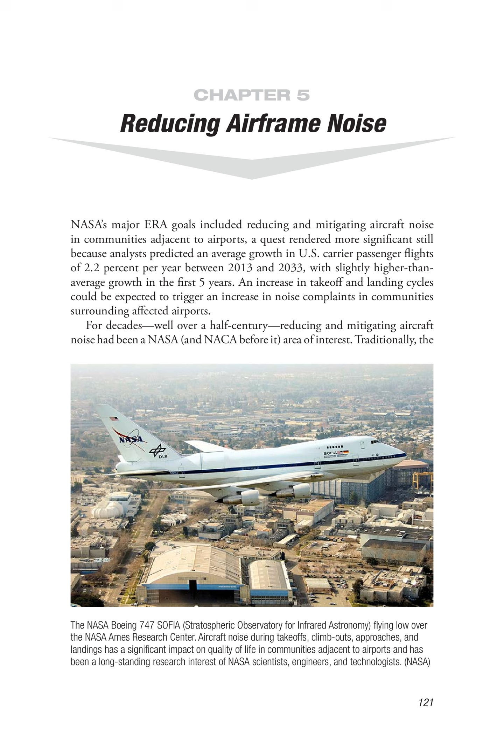Chapter 5: Reducing Airframe Noise. NASA's major ERA goals included reducing and mitigating aircraft noise in communities adjacent to airports, a quest rendered more significant still because analysts predicted an average growth in U.S. carrier passenger flights of 2.2% per year between 2013 and 2033, with slightly higher than average growth in the first 5 years. An increase in takeoff and landing cycles could be expected to trigger an increase in noise complaints in communities surrounding affected airports. For decades, well over a half-century, reducing and mitigating aircraft noise had been a NASA, and NACA before it, area of interest.

Traditionally, the greatest source of aircraft noise has been propulsion systems, particularly as the growl of piston and propeller systems gave way to the roar of turbojets. Over the past 50 years, air traffic increased dramatically and communities rapidly encroached on airport boundaries. Noise complaints soon became the number one issue reported to FAA public liaison offices around the country. Solutions ranging from restricting the number of flights allowed per day to nighttime curfews for commercial air carriers had an adverse economic impact. Noise abatement approaches and departure trajectories have mitigated the problem to some degree, but the most significant improvement was the advent of quieter turbofan engines.

Advances in quiet engine technologies have resulted in such significant reductions in engine noise during takeoff and landing operations that, for current state-of-the-art aircraft, engine and airframe noise are nearly comparable. NASA researchers, therefore, sought to decrease airframe noise in order to minimize community exposure to aircraft acoustics. Primary sources of airframe noise include the wing high lift system, slats and flaps, and the undercarriage, nose and main landing gear. Secondary sources include slat brackets, flap actuators, and gaps between airframe and control surfaces.

According to Mehdi Khorrami, lead project investigator at LaRC and ERA noise reduction element lead, a complete understanding of the problem requires full consideration of both engine noise and airframe noise contributions to an airplane's acoustic signature. You have to look at the problem from a system level, he said, because if you can reduce overall noise by 3 or 4 decibels, you have effectively cut it in half.

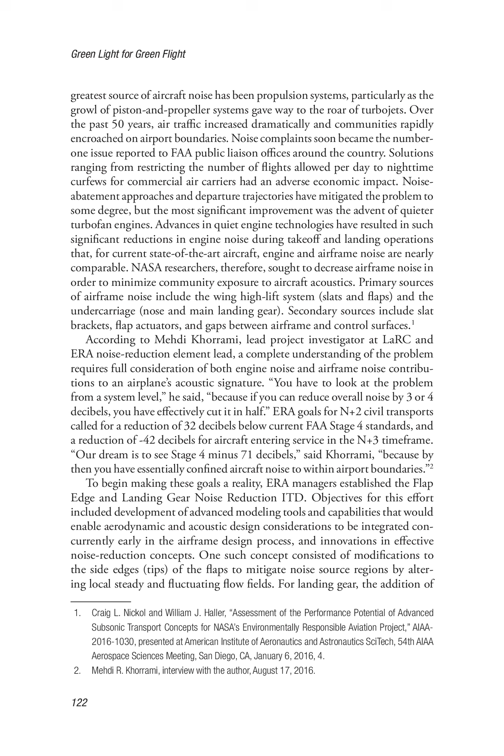One such concept consisted of modifications to the side edges, or tips, of the flaps to mitigate noise source regions by altering local steady and fluctuating flow fields. For landing gear, the addition of aerodynamic fairings altered the flow fields impinging on various gear components in a way that minimized pressure fluctuations on the gear surfaces.

During approach and landing, when engines are throttled back to reduce thrust, the noise generated by various parts of the airframe may be louder than that produced by the propulsion system. In order to effectively mitigate this problem, it is necessary to lessen the combined acoustic signatures from all major contributors concurrently. As you reduce noise from one source, Khorrami explained, another one becomes more prominent. The task is especially complicated because aircraft of different sizes and configurations offer different challenges.

Any protuberance in an area where it creates turbulent flows will generate airframe noise, Khorrami said. Turbulent vortex filaments interacting with the flaps and landing gear merge together and become strong vortices, creating pressure fluctuations on the aircraft's surface that we hear as noise.

Initially, Khorrami led studies of the acoustic effects of specific structures such as the nose gear and flaps. I was working with Faye Collier under the subsonic fixed-wing program, and we made some measurements with a G550 aircraft in 2006, he recalled. Researchers at LaRC then conducted further investigations with a small-scale, semi-span model of a G550 to look at several aircraft components and try to understand their effect on airframe noise characteristics.

In 2009, the team decided to expand the research from just looking at individual components to visualizing the entire airplane as an integrated system. When the ERA project was created, we fully migrated our research to ERA because it was a technology development project, Khorrami said, and we wanted to develop new technologies to reduce airframe noise. He added that, during Phase 1 of ERA, our major focus was trying to see how much data we could get from scale models, using the same G550 testbed we used in 2006, and in Phase 2 we made a full-blown effort to push our computational models.

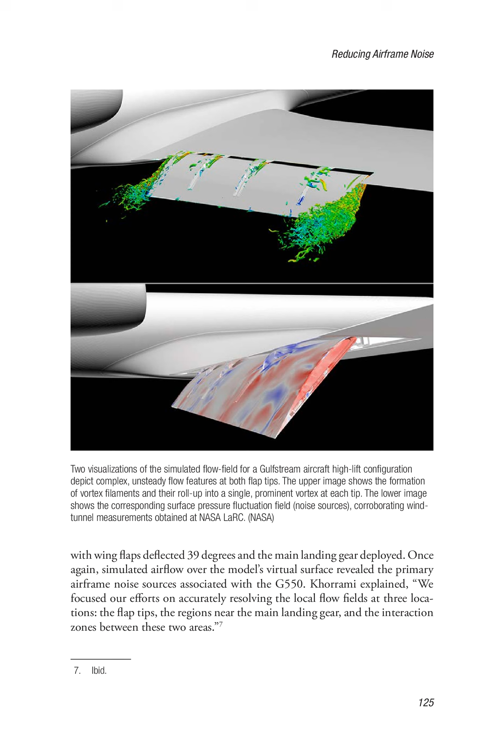High-fidelity simulations enabled researchers to probe into the underlying noise-generating mechanisms associated with airflow over the flaps and landing gear, and to develop potential solutions. Because these simulations presented numerous challenges due to geometric complexities and requirements for a wide range of spatial and temporal resolution, all computations had to be performed on Pleiades, one of the world's most powerful supercomputers.

This vital resource was located at ARC, where the NASA Advanced Supercomputing Division's visualization team created renderings from the resulting datasets. According to Khorrami, even medium-resolution simulations required as many as 4,000 processors and 1.5 million processor hours and generated 40 to 50 terabytes of data. The knowledge gained from these computations allowed us to develop and improve several concepts that reduce the noise generated by these components, he said.

Wind tunnel test setup. Several methods for mitigating airframe noise underwent aeroacoustic testing in the NASA LaRC 14 by 22-foot subsonic wind tunnel during 3 test series, each lasting 4 to 5 weeks. The test article was an all-metal 18% scale, semi-span, high-fidelity model of a Gulfstream G550 aircraft.

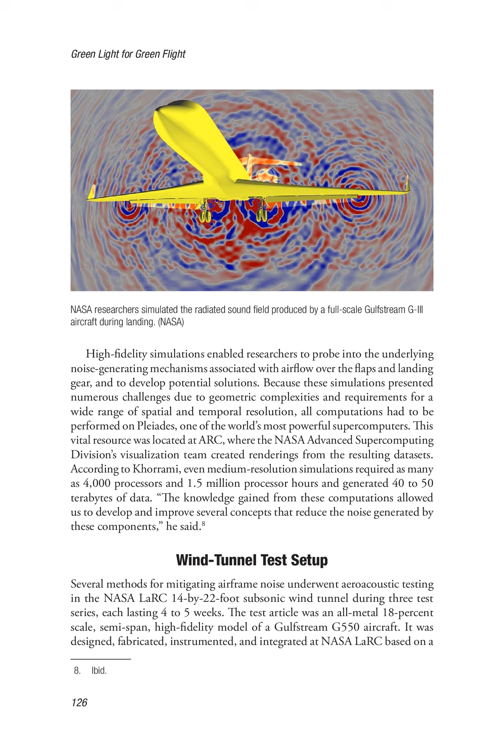It was designed, fabricated, instrumented, and integrated at NASA LaRC based on a set of airframe geometry files provided by Gulfstream. Model details included a 185.4-inch long half-span fuselage, a wing measuring 104.5 inches from the tunnel floor to the tip, a flow-through engine nacelle, engine pylon, and high-fidelity scale replicas of the flap and main landing gear.

The initial test series, completed in November 2010, documented the model's basic aerodynamic characteristics. At this time, researchers acquired measurements of such global forces as lift and drag, along with steady and unsteady surface pressure measurements. The second series of tests took place in February and March 2013.

These experiments were dedicated to conducting comprehensive aeroacoustic testing of the model in a landing configuration, with and without flap/gear noise reduction devices installed. The third and final test series was completed in April 2013. These tests were devoted to collecting off-surface flow measurements from the model in baseline landing configuration with emphasis on gear-flap flow interactions.

Acquisition of acoustic measurements and determination of flyover sound directivity patterns for flap/gear noise sources necessitated that the wind tunnel facility be operated in an open wall mode, in which the ceiling and the sidewalls of the tunnel test section were raised. This had been determined during the 2010 series, when tests demonstrated that the model's overall aerodynamic characteristics were largely unaffected regardless of whether the measurements were conducted with the test section in a closed wall or open wall mode.

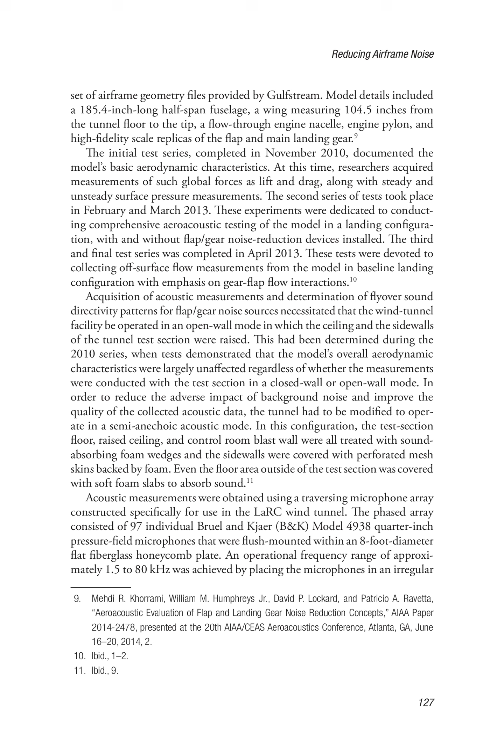An operational frequency range of approximately 1.5 to 80 kHz was achieved by placing the microphones in an irregular, circular pattern comprised of 16 arms with 6 microphones in each, and a single microphone positioned at the center of the array. The array panel, positioned at a lateral distance of 17.5 feet from the tunnel center line, was mounted on a rigid frame attached to 2 sets of 44-foot-long linear traversing rails.

These rails were positioned in such a way as to allow the array to face the pressure side of the G550 model and permit smooth movement of the array panel in the streamwise direction along the full length of the test section. An additional set of 6 microphones was positioned around the phased array panel for use in characterization of noise directivity for various model configurations. Given that airframe noise during landing operations was a primary interest, a 39-degree flap setting with the main landing gear alternately installed and removed were the most heavily tested configurations.

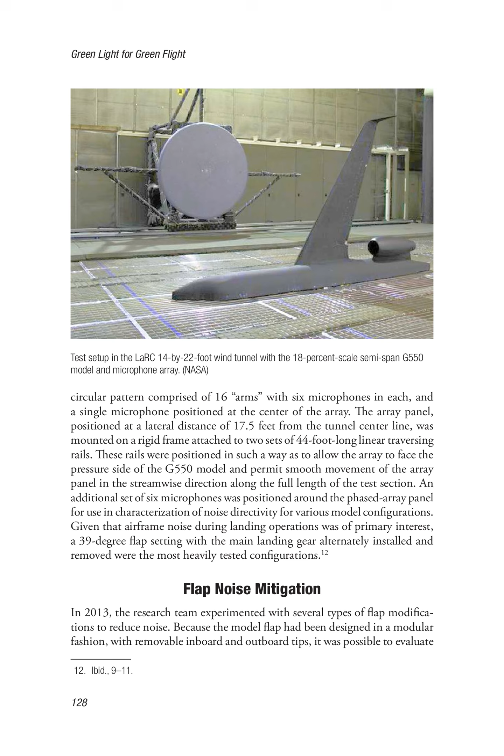12. Flap noise mitigation. In 2013, the research team experimented with several types of flap modifications to reduce noise. Because the model flap had been designed in a modular fashion, with removable inboard and outboard tips, it was possible to evaluate more than 30 permutations of 5 different design concepts. These included a porous skin treatment, a variety of bulk and locally reactive acoustic liners, flap edge noise reduction fins, FENoRFins, with both circular and non-circular cross-sections, flexible side edge link, FLEXSEL, and reactive orthotropic lattice diffuser, ROLD.

For all concepts tested, the extent of the tip area receiving treatment was carefully tailored to remain very small relative to the total flap surface area, and the spanwise extent of treated area scaled with local maximum flap thickness. To maintain the flap's overall aerodynamic efficiency, the first 10% of the flap chord at the leading edge remained unaltered.

13. The porous tip concept involved substituting the upper, lower, and side surfaces of the flap with a wire mesh skin having a specific acoustic resistance. Treated surfaces produced a cavity at each tip that allowed interaction between the external flow and the internal cavity fluid, air. Computational models and earlier studies guided the design of the porous surface treatment, which was tailored to minimize aerodynamic performance penalties while achieving substantial noise reduction.

To achieve these goals, technicians fabricated cage-like structures at each tip to accommodate a wire mesh skin that was carefully spot welded to the cage to avoid creating surface imperfections. This resulted in a treated area that was continuous with the remaining flap surfaces. Researchers produced 4 sets of treated inboard and outboard tips with respective skin surface resistances of 150, 270, 450, and 570 rayl, a unit of acoustic impedance.

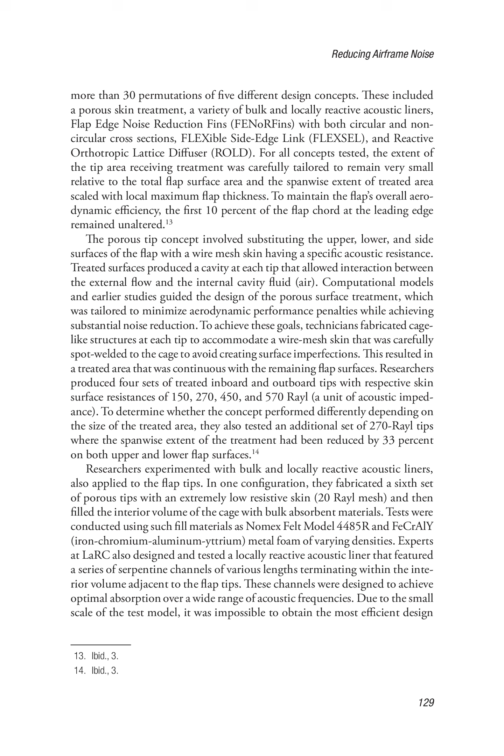Experts at LaRC also designed and tested a locally reactive acoustic liner that featured a series of serpentine channels of various lengths terminating within the interior volume adjacent to the flap tips. These channels were designed to achieve optimal absorption over a wide range of acoustic frequencies. Due to the small scale of the test model, it was impossible to obtain the most efficient design for maximizing sound absorption, but these tests served as useful proof of concept demonstrations.

15. FENoRFins are modifications consisting of an array of densely packed comb-like structures, fins, in a 3-dimensional arrangement extending inward in the spanwise direction from the flap side edge to reduce airframe noise generated by the interaction between unsteady airflow and the flap edge surface. Limiting control action to the steady and fluctuating fields within a very small region near the edges leaves the gross aerodynamic characteristics of the flap unaltered, minimizing aerodynamic penalties.

The aeroacoustic environment created by the FENoRFins alters the effective boundary condition at the surface of the flap, significantly reducing the steady pressure differential experienced by the flap edge. As a result, the vortex formation process at the edge may be delayed or substantially weakened.

16. For subscale testing, the spanwise extent of the fin region, that is, the length of each FENoRFins element, followed a slanted pattern with the shortest fins applied near the leading edge and the longest toward the trailing edge of the flap. Researchers evaluated several FENoRFins concepts and discovered that circular cross-section fins with the smallest diameter tested produce the best noise reduction. 17. Researchers also experimented with a continuous mold line flap configuration.

They conducted extensive testing of FLEXSEL, a structural link design in which the flap side edge is connected to the wing edge adjacent to the flap with stretchable hyperelastic materials. In order to effectively evaluate its noise reduction capability, the team tested both rigid polycarbonate and soft elastomeric versions of the FLEXSEL concept. An additional set of rigid FLEXSEL flap tips with a 40% larger transition section was fabricated to determine the effects of more extensive spanwise treatment on aerodynamic and acoustic performance.

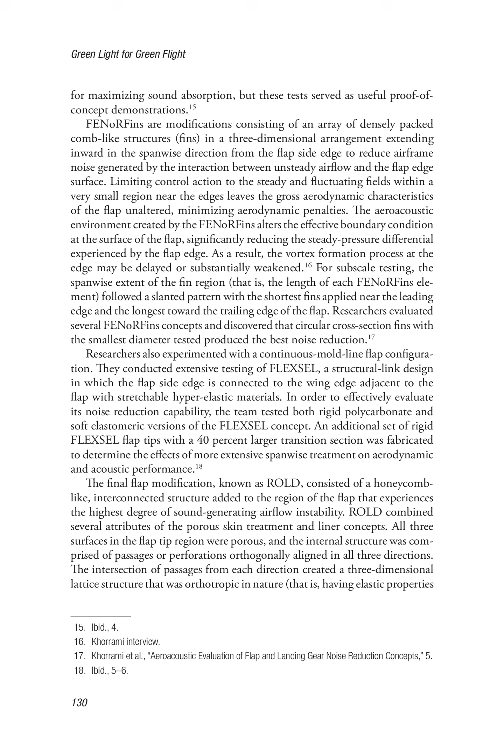The final flap modification, known as ROLD, consisted of a honeycomb-like, interconnected structure added to the region of the flap that experiences the highest degree of sound-generating airflow instability. ROLD combined several attributes of the porous skin treatment and liner concepts. All three surfaces in the flap tip region were porous, and the internal structure was comprised of passages or perforations orthogonally aligned in all three directions. The intersection of passages from each direction created a three-dimensional lattice structure that was orthotropic in nature, that is, having elastic properties in 2 or 3 planes perpendicular to each other.

Researchers tested 3 sets of ROLD flap tips with different sized holes, spaced evenly. Acoustic performance of the ROLD concept improved as the size of the holes decreased, with the smallest diameters producing the highest noise reduction. Each of the flap modifications tested could be easily retrofitted to existing aircraft structures, and several designs demonstrated significant noise reduction without adversely affecting aerodynamics.

The porous characteristics of ROLD and the gaps between FENoRFins fin elements changed the boundary condition at the surface of the flap, reducing the steady pressure differential experienced along the flap edge. This reduced turbulent flow and delayed the type of vortex formation that causes noise during landing approach. Aerodynamic penalties were minimized by limiting the control action to the steady and fluctuating fields within a very small region near the flap edge. Testing of the 18% scale model thoroughly validated earlier computational modeling. According to Khorrami, comparisons of fluctuating surface pressures between untreated and treated flaps showed an order of magnitude reduction of pressure fluctuation amplitude by 3 to 5 decibels.

Main landing gear noise mitigation. Mitigating noise from the main landing gear posed a greater challenge because an aircraft undercarriage comprises a complex system of subcomponents of various shapes and sizes. Whereas all flaps are generally similar in shape, landing gear configurations vary widely from aircraft to aircraft depending on size and mission requirements. Consequently, researchers realized, no single concept could be expected to produce the desired noise reduction levels. It quickly became apparent that they would have to approach the problem of gear noise reduction using multiple, complementary concepts tailored to specific noise sources associated with individual subcomponents.

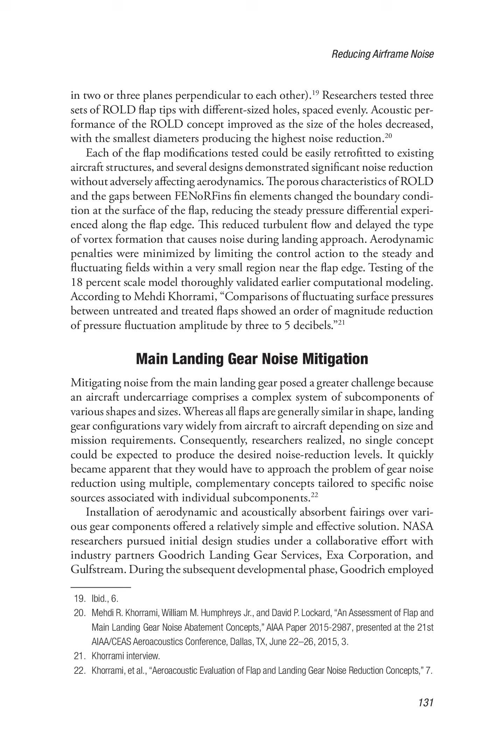Installation of aerodynamic and acoustically absorbent fairings over various gear components offered a relatively simple and effective solution. NASA researchers pursued initial design studies under a collaborative effort with industry partners Goodrich Landing Gear Services, Exa Corporation, and Gulfstream. During the subsequent developmental phase, Goodrich employed high-fidelity computer simulations to obtain a set of viable fairing concepts. Designers then used these same computational models to further refine the most promising concepts to achieve designs that provided at least the minimum desired noise reduction goals for each gear component.

To accurately evaluate the acoustic performance of the landing gear noise reduction concepts using the 18% scale model, technicians replaced the baseline Gulfstream landing gear with a modified set fabricated by Goodrich. Prior to installation, however, researchers placed the Goodrich gear into the Virginia Tech Stability Tunnel as a standalone test article. From September 2011 until July 2012, they tested the effectiveness of numerous permutations of 7 independent noise reduction concepts. The results guided researchers in identifying the most effective technologies to be further evaluated on the half-span model in the 14 by 22-foot wind tunnel at LaRC in 2013. These technologies were simple but effective.

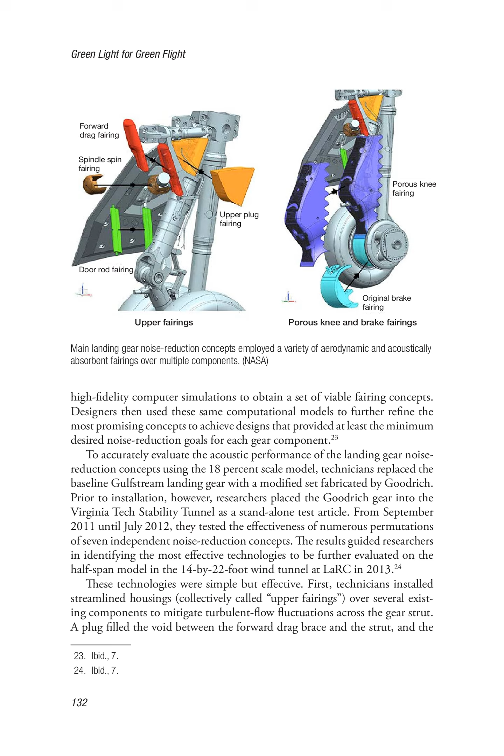First, technicians installed streamlined housings, collectively called upper fairings, over several existing components to mitigate turbulent flow fluctuations across the gear strut. A plug filled the void between the forward drag brace and the strut, and the landing gear door connecting rod was covered with an aerodynamic cover. Next, a more complex structure called a porous knee fairing covered the upstream main post, and a streamlined, tight-fitting fairing covered brake components located between the two wheels. Researchers were pleased to find that the knee fairing significantly diminished the noise-producing flow interaction between the front and rear struts.

An early brake fairing design performed well acoustically but was deemed impractical for application in a realistic environment at full scale due to brake cooling and maintenance issues. Instead, it was replaced with a larger aerodynamic fairing that partially covered the front portion of the two main wheels.

Testing of both solid and partially porous wheel fairings proved very effective in reducing aerodynamic noise, while avoiding the pitfalls of the earlier brake fairing concept. The only challenge left was to reduce the low-frequency noise associated with the wheel well cavity. The solution involved installing a stretchable mesh to cover the cavity opening. During tests on the isolated Goodrich gear in the Virginia Tech tunnel, mesh cover reduced low-frequency gear noise by more than 2 to 3 decibels.

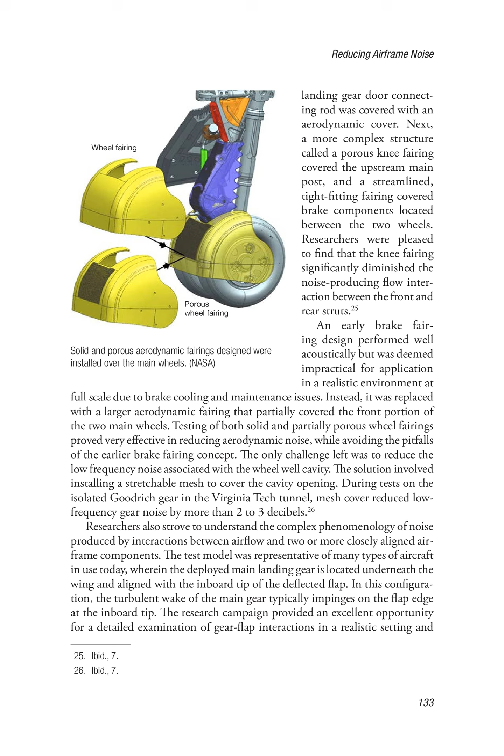Researchers also strove to understand the complex phenomenology of noise produced by interactions between airflow and two or more closely aligned airframe components. The test model was representative of many types of aircraft in use today, wherein the deployed main landing gear is located underneath the wing and aligned with the inboard tip of the deflected flap. In this configuration, the turbulent wake of the main gear typically impinges on the flap edge at the inboard tip. The research campaign provided an excellent opportunity for a detailed examination of gear flap interactions in a realistic setting and their effects on the airplane's acoustic signature.

Using various combinations of low-noise gear modifications and flap, researchers demonstrated that flap noise was largely unaffected by the deployed gear. The reduction in aerodynamic noise produced by the main landing gear was primarily attributed to a slowing of the flow impinging on the gear caused by flap downwash. As Khorrami noted, we showed that installation effects have a pronounced impact on gear noise, which was substantially reduced when the flap was deflected downward, as on landing approach.

Developing predictive tools, testing new noise reduction technologies and hardware was only one aspect of the flap and landing gear noise reduction ITD. The other involved development of new design tools to aid engineers in modifying existing wing flaps and landing gear, or designing new ones, that would produce significantly reduced acoustic signatures during takeoff and landing. In the latter, ERA researchers pushed the state-of-the-art in airframe noise prediction modeling that could be applied to everything from subscale test articles to a full-scale aircraft with all its complex geometries.

That was, I think, the most important thing to come out of our ITD, Khorrami said. By the end, we had developed a number of technologies that resulted in 4 or 5 patents, but I am most proud of the computational simulation. It was truly world-class. The complexity of the problem created a serious challenge for engineers and programmers. Among the most daunting tasks was the development of a virtual full-scale geometry model from very old airframe design data provided by Gulfstream. These were data that had to be converted so we could use it in CAD, computer-aided design, models for both the wind tunnel and computer simulation, Khorrami explained, and that took a lot of detailed effort.

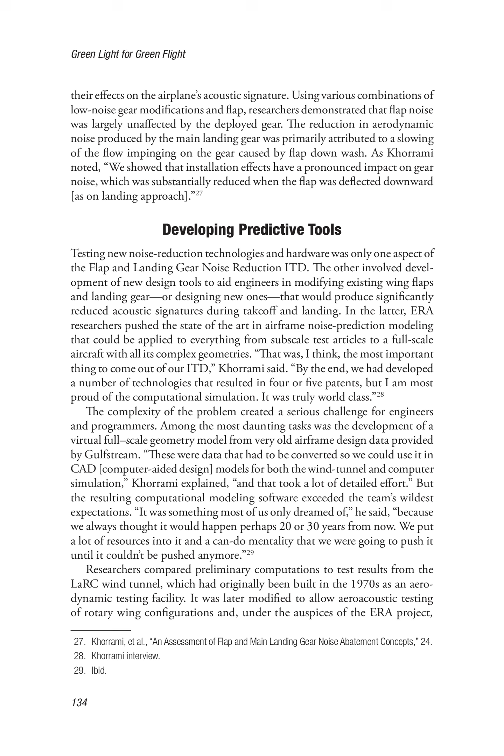Researchers compared preliminary computations to test results from the LaRC wind tunnel, which had originally been built in the 1970s as an aerodynamic testing facility. It was later modified to allow aeroacoustic testing of rotary wing configurations and, under the auspices of the ERA project, underwent significant improvements to facilitate airframe noise testing of both conventional and unconventional aircraft configurations.

In advance of tests with the G550 model, researchers measured tunnel background noise inside an empty test section, with and without airflow, employing an array of microphones positioned at specified flyover directivity angles that would later be used to acquire the model's acoustic signature. Additionally, a series of pyrotechnic charges was detonated along the center line of the empty tunnel in front of the microphone array to identify significant unwanted sound reflections that might cause spurious returns. With careful planning and extensive acoustic treatments applied to the test section floor, sidewalls, and ceiling, such interference was effectively eliminated. There were, however, still obstacles to overcome.

When acoustic engineers compared integrated sound pressure levels from the microphone array, computed over the entire measurement grid, with the spectrum obtained from the individual microphone mounted at the center of the array, they discovered elevated tunnel background noise at both low and high frequencies. Jet shear layer interaction with the flow collector lip, which was not acoustically treated, seemed the most likely cause of the higher background noise at low frequencies. Elevated background noise at high frequencies was mostly due to roughness of the tunnel floor, which was formed from wire cages containing sound-absorbing foam wedges.

This background noise rendered measurements with individual microphones unreliable for determining absolute noise levels for the model and had to be accounted for when processing the final test data.

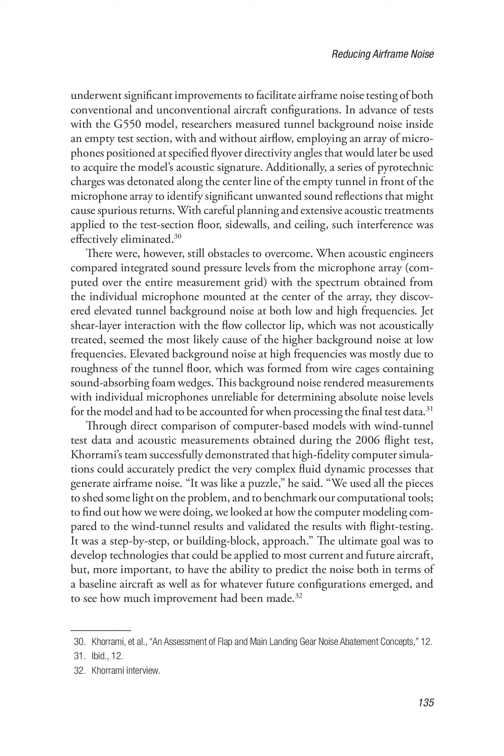To find out how we were doing, we looked at how the computer modeling compared to the wind tunnel results and validated the results with flight testing. It was a step-by-step, or building block, approach. The ultimate goal was to develop technologies that could be applied to most current and future aircraft, but, more important, to have the ability to predict the noise both in terms of a baseline aircraft as well as for whatever future configurations emerged, and to see how much improvement had been made.

Modeling the acoustic signatures of flaps and slats was relatively easy because these aerodynamic devices have a high degree of universality. Whether installed on a regional jet, a 767, or something else, the basic configuration is very similar. Obviously, said Khorrami, the noise prediction tools that we have developed can be applied regardless of aircraft geometry, whether it is a tube and wing or a hybrid wing body, and once you have the prediction tool, you can apply it to any concept, any configuration, and you can develop noise reduction technology for that particular configuration.

The problem of landing gear noise is much more complex because each type of aircraft has a different undercarriage geometry. Depending on the size and weight of the aircraft, the nose gear may have one or two wheels, and the main gear may have as many as three on each gear truck. The more complex the gear arrangement, the more auxiliary components are necessary.

All those little details can have an impact on how much noise is generated and how that noise propagates, Khorrami explained. With a good prediction tool, you can see how the noise gets generated and figure out what other areas you have to go after, and then you can tailor your design as necessary.

Computational software for the project was adapted from an existing program developed by Exa Corporation for automotive applications. At the time that ERA began, EXA was seeking to expand the company's business from automotive to aerospace. It was a convergence of the right people at the right time, said Khorrami.

We also used some of our own in-house code as a benchmark to make sure their software worked for what we wanted to do. The EXA software proved well suited to highly complex geometries that challenged other codes. During our project, the EXA code was greatly expanded and improved because we pushed the state-of-the-art, he added.

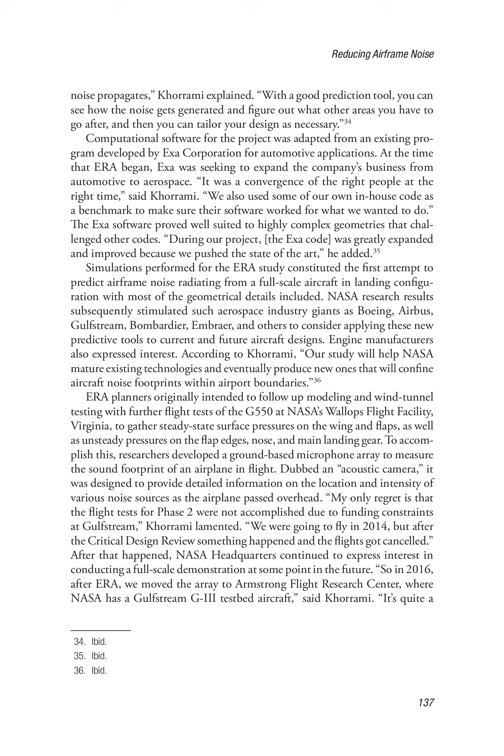So in 2016, after ERA, we moved the array to Armstrong Flight Research Center, where NASA has a Gulfstream G-III testbed aircraft, said Khorrami. It's quite a capable system, he added, so we are now trying to transfer the technology we developed under ERA to a flight demonstration at Armstrong.

This setback forced Khorrami's research team to push the computational simulation to its fullest capability. Fortunately, the structure of the ERA project provided the necessary resources to do this.

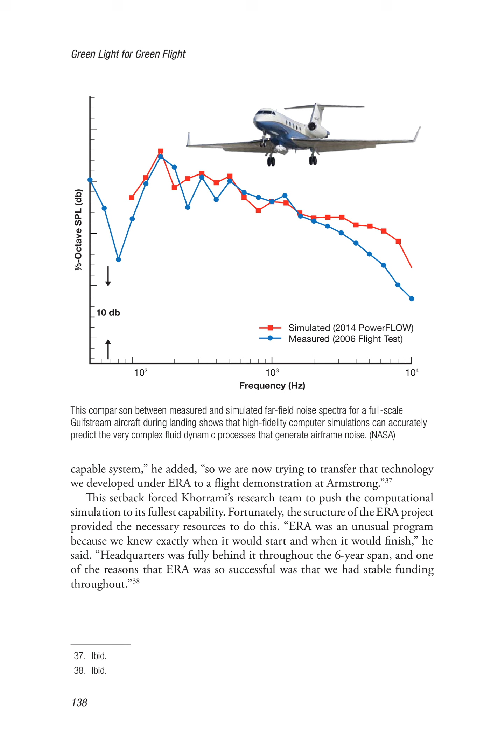ERA was an unusual program because we knew exactly when it would start and when it would finish, he said. Headquarters was fully behind it throughout the six-year span, and one of the reasons ERA was so successful was that we had stable funding throughout.

Sound advice: Stephen Rizzi, a senior researcher for aeroacoustics at LaRC, led another team whose mission was to create technological tools capable of predicting and simulating sounds of flying machines still in the conceptual phase. Using computer models, flight measurements, and wind tunnel data, they developed methods for predicting the sonic characteristics that would be produced by aircraft of any given configuration.

These data were then turned into a set of synthesized sounds that were played for volunteers who participated in what were dubbed psychoacoustic tests, measurements of how humans react to different levels of aircraft noise. Rizzi's system produced scientifically valid simulations of whirring rotors, roaring jet engines, and even the sounds of wind rushing over flaps and landing gear. Programmers had to consider such elements as distance, motion, the Doppler effect, and atmospheric influences on sound.

This process of studying a test subject's reaction, called auralization, is intended to help aircraft designers take noise into consideration when imagining new shapes and configurations. According to Rizzi, the automotive industry has been conducting similar tests for many years, but until recently there has not been a similar capability for aircraft designers. By putting these pieces of prediction and auralization together, he explained, we have created a new capability.

The new noise-predicting software tool is called the NASA Auralization Framework, NAF. It incorporates a set of computer codes to transform noise predictions from numerical data into actual sounds. This is especially important if future aircraft are to be designed so as to cut noise to nearly one-eighth of what is currently allowed, and to confine the most annoying noise levels to within an airport's outer fence line.

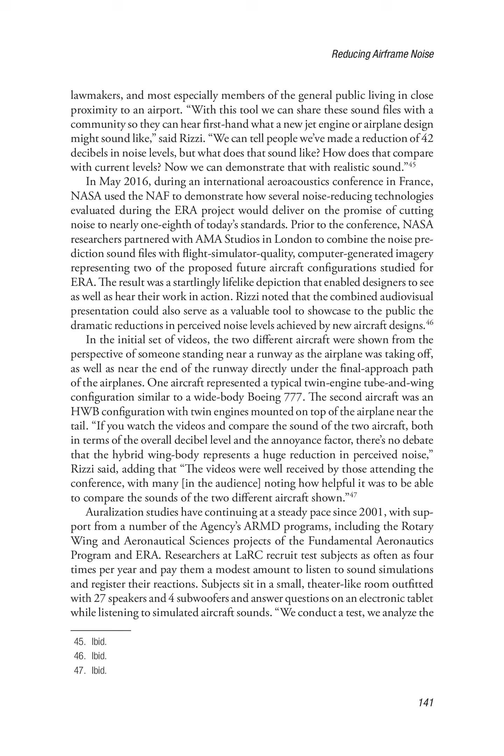We conduct a test, we analyze the data, and we report on it, Rizzi said.

Research results will become increasingly valuable in years ahead due to predicted growth in commercial air traffic and the advent of new technologies such as drones for delivering consumer goods. We're in a leadership position on this, Rizzi noted, describing his team's forward-thinking acoustics research.

There is no organization I know of that has the capabilities that we do, it's a one-stop shop for this type of work. He noted that his team had come a long way from initially focusing on making recordings of aircraft.

And reproducing those sounds in a controlled lab setting for test subjects. That works well if the aircraft you're interested in is a real aircraft, he said, but we work for NASA.

So we're more interested in the future and there are no recordings of paper planes. That led us down the path of having to synthesize the sound. Rizzi knows what he's talking about.

He is a musician in his spare time and he sees a clear relationship between the science of noise and the art of melody. There's a lot of overlap in the techniques used to generate the musical kinds of sounds and those used with aircraft noise synthesis, he said. It's why he enjoys his work so much. It's new and there aren't a lot of other people doing it.

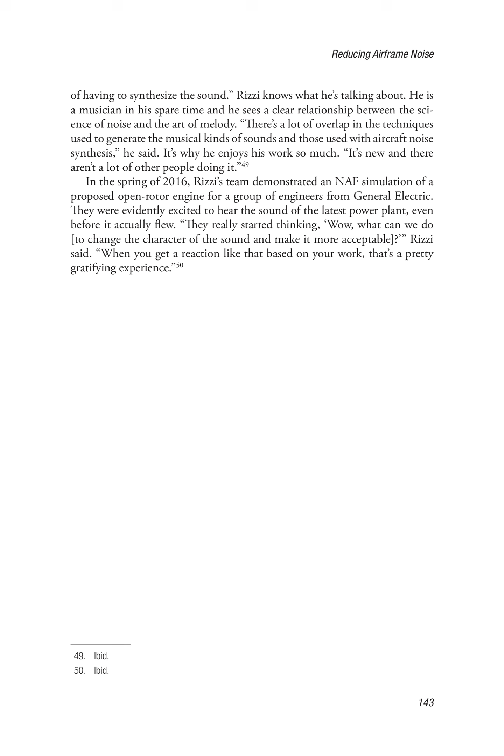In the spring of 2016, Rizzi's team demonstrated an NAF simulation of a proposed open rotor engine for a group of engineers from General Electric. They were evidently excited to hear the sound of the latest power plant, even before it actually flew. They really started thinking, wow, what can we do to change the character of the sound and make it more acceptable? Rizzi said. When you get a reaction like that based on your work, that's a pretty gratifying experience.